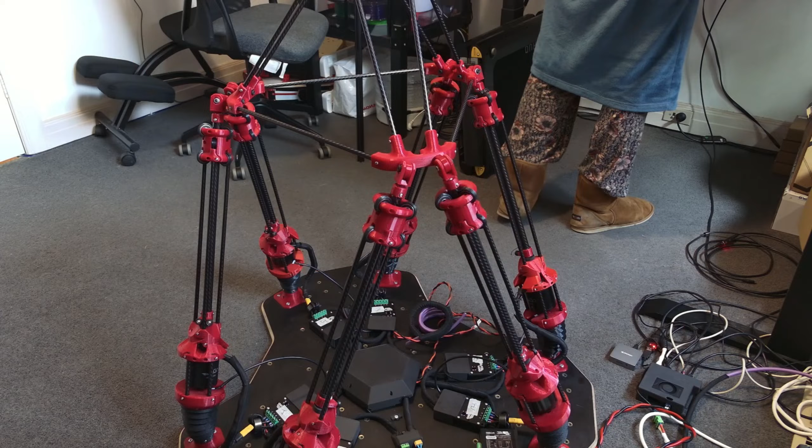To give a little backstory, let me show you on the actual robot. There's a little spoiler here for something I want to show you in a sec, but that's okay. These joints down the bottom of Jugglebot, and also at the top, are basically ball joints. One is a ball joint, and the other is like a ball joint with the twist axis removed. I'm a big fan of compliant mechanisms, and I'd really like to add compliant mechanisms somewhere into the robot. I think the best spot would be for these joints down the bottom. They need 2 degrees of rotational freedom, to rotate this way and this way. Right now they are metal magnetic ball joints, and they work, but it's very opaque.

These bellows I have around them are there to stop this twisting rotation, which they do extremely well. But because they're opaque, you can't see the ball joint inside, so you just see this thing, and it's like, well, what's in there? I don't really like that. I want it to be open and really clearly visible as to what's actually going on. So I'm in the market, so to speak, for a replacement for those joints.

Jean-Marc has taken a particular interest in compliant mechanisms, which I love, and has been looking around for different options. This one has exactly those 2 degrees of freedom, so it would have this rotation and this rotation, and you can obviously combine these together.

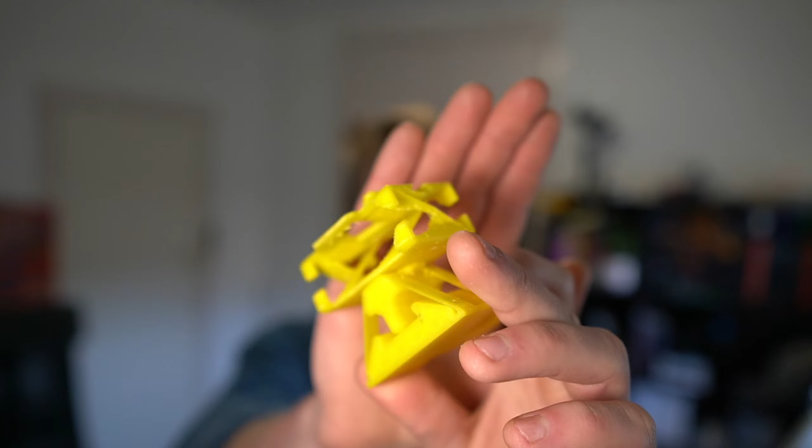It's kind of hard to show this on camera, but it can do the full, both degrees of freedom. Obviously this print quality is kind of crap, I don't know if you can really see it from a distance, but my printer could do with some tuning, but it still works. I really like this design, it's very good, it's solid.

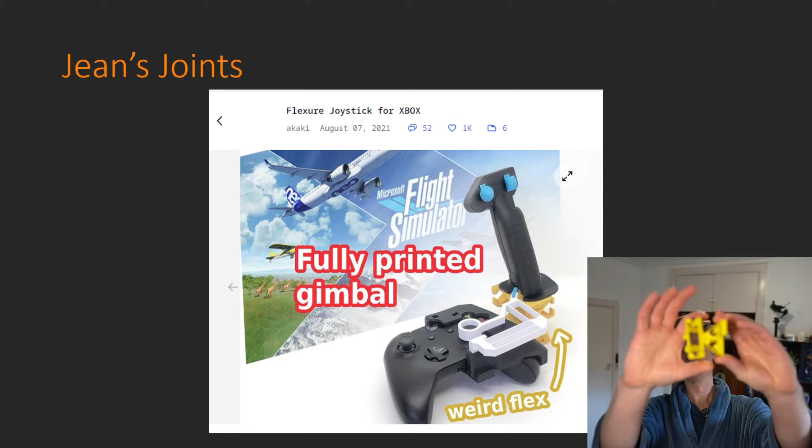I think that for me, if we were using this for the joint that I just showed, we would want to change the form factor of this a bit. I've completely just taken this straight from the model here, so there's all these weird other add-on bits that we obviously don't need. I don't know if I like the general shape of it, but the compliant mechanism structure part, super cool, I really like it.

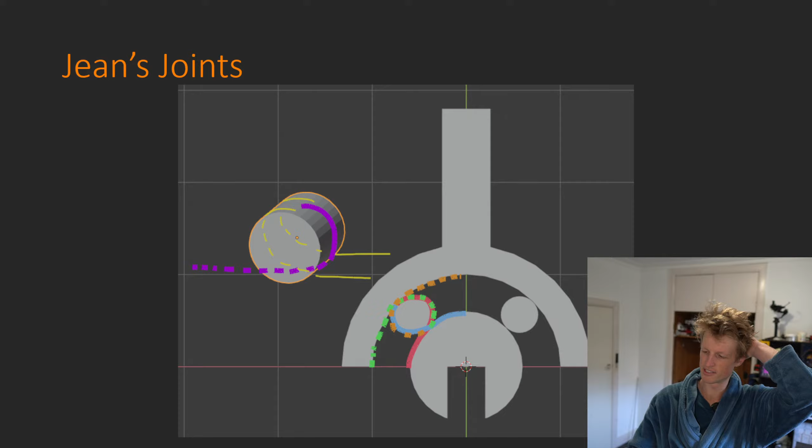Even cooler, in my opinion, is Jean-Marc has designed his own compliant mechanism. You may remember from last week, I should have printed another one off, but the printer was going non-stop this last week. Jean-Marc designed a compliant mechanism that looked similar to this, and it was the one that actually snapped in the stream, and he's come up with this slightly different design that I think has very strong promise.

It looks like it would be a bit tedious to put together, but it looks like it would be extremely stiff when it is together.

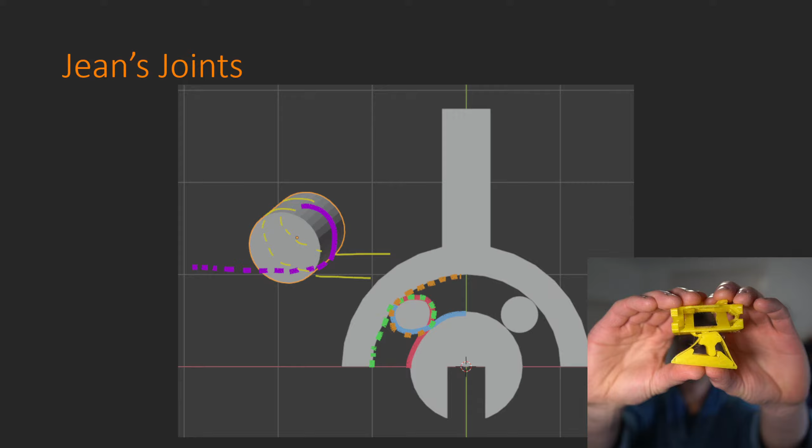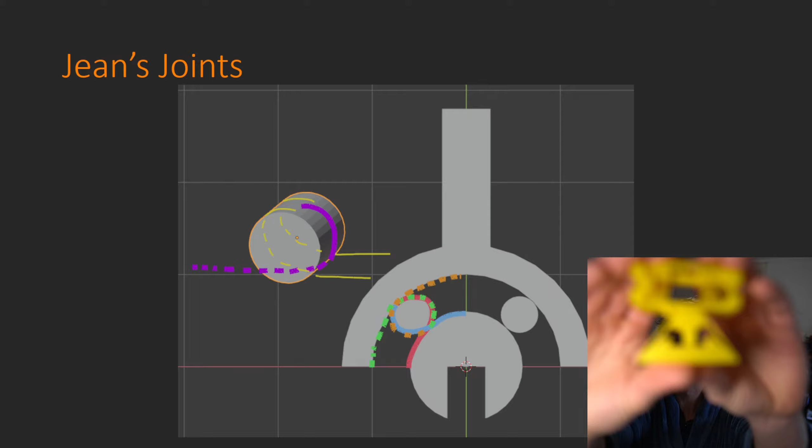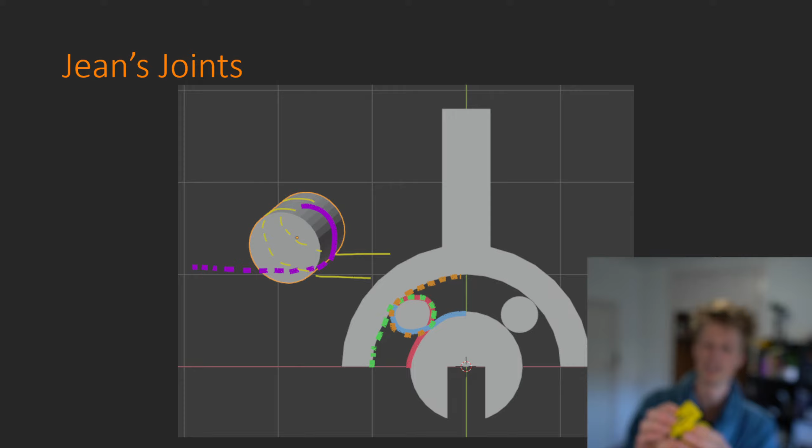One disadvantage that compliant mechanisms often have is that you can often move them in a way that they're not supposed to move. This is only supposed to be able to move with these 2 degrees of freedom, it shouldn't be able to twist this way, which it does do a very good job of resisting. But if you can see, there's a slight gap beneath this peg and the bottom, and I can compress it down, it's a little bit wobbly, so it flexes in a way that it's not supposed to flex. That's not a very large deflection in that direction, but we really want as little as possible.

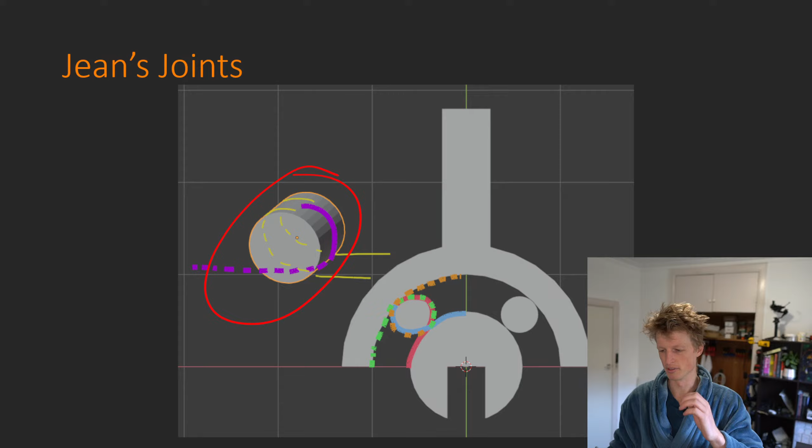I think this design that Jean-Marc has come up with would be pretty good at achieving that. In case you can't tell what's going on here, this little cylinder off to the left is an example of one of these rollers, and around that cylinder is wrapped 3 sheets. I don't know what we could use for them, but he was suggesting cable ties in a similar design, so maybe cable ties would work, but it'd have to be something quite flexible.

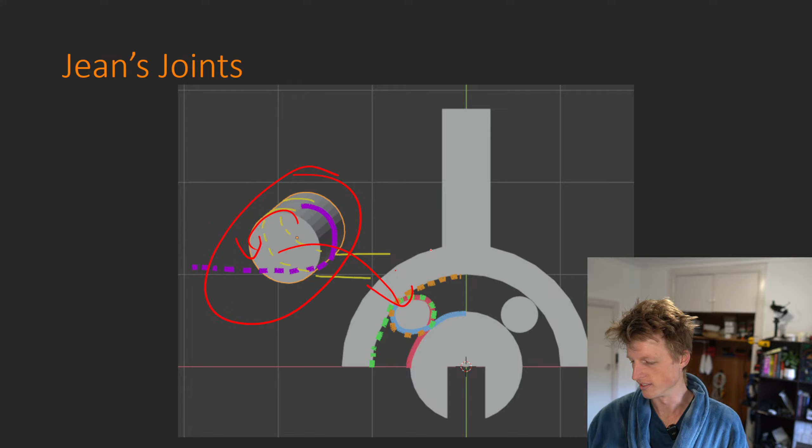The idea is that if this cylinder were to rotate in that direction, it would wrap up the purple sheet and unwrap the yellow sheets, and rotation in the other direction is the opposite. If we combine this into this kind of big arm mechanism, as the arm rotates clockwise and counterclockwise with respect to this lower part, those sheets will wrap and unwrap around those cylinders, and it should keep it all extremely tight.

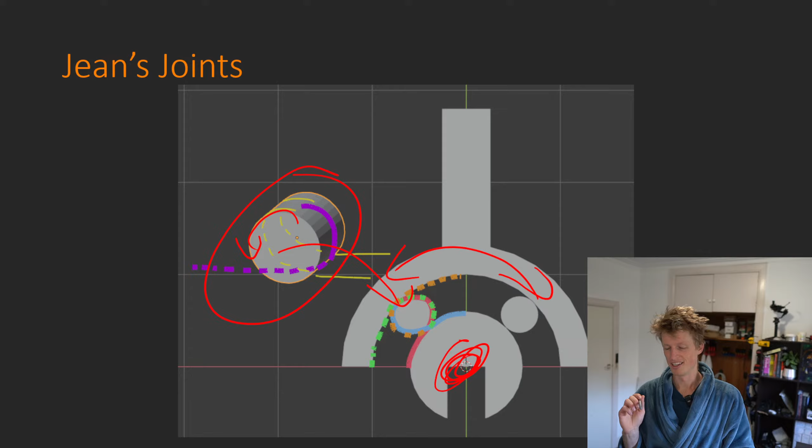I'm very keen to see where this goes, if anywhere. I think it's a really, really clever design. I would be very, very excited to see this in action.

Relatedly, Jean-Marc, I spoke with him about what I could name this segment, because this is a bit of an ongoing thing now that he's taking such an interest in the compliant mechanisms, and because I have such a love for compliant mechanisms, I want to move this aspect of the project forward, even though I don't really personally have as much time as I would like to dedicate to it, because realistically those joints are pretty good as they are. The only real gripe that I have with them is that they are covered, and also the fact that those bellows around them are really annoying to print.

The TPU has to be extremely dry for that to print nicely, and some of them have actually broken, so I need to reprint them, and I'm really not looking forward to that. Yeah, so compliant mechanisms would be great.

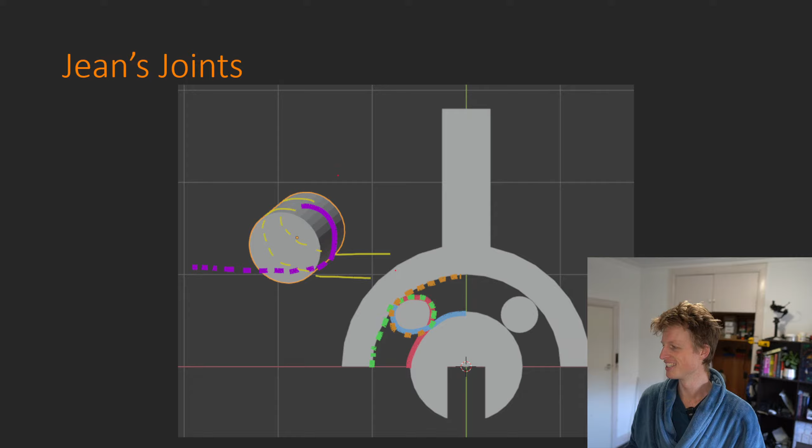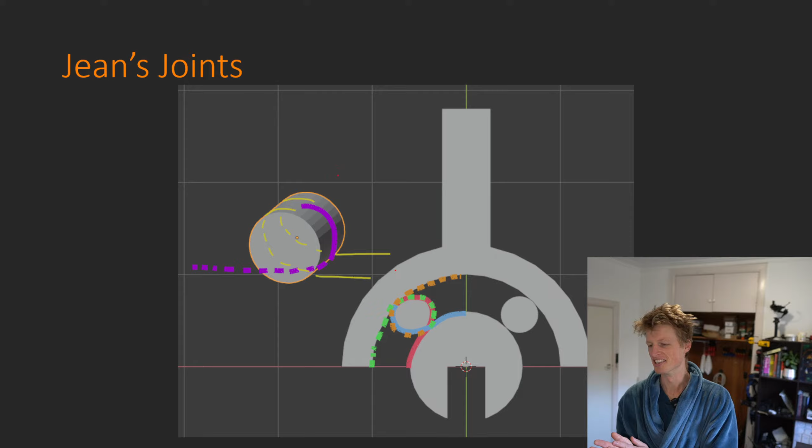If anyone watching has an interest in compliant mechanisms, I strongly recommend you check out the stream on Zulip - I can't remember which one, but I'll add a link to the description after I'm done recording. It's getting to be a pretty developed conversation now. If you have any thoughts on how we can design a 2 degree of freedom compliant mechanism with as little slop as possible, we would love to know. It's a very exciting area of Jugglebot research, in my opinion, even though I don't have as much time as I'd like to spend on it.

Cool, so on to the actual updates for Jugglebot. Jugglebot is finally moving. It is extremely exciting, I'm very happy for this. I've been very nervous about turning it on, and yesterday when I was doing all this testing, I had my hand over the e-stop button for a lot longer than I probably needed to. But I'm very glad that I did, because I almost broke Jugglebot, as I'll talk about in a sec.

But first, I want to take you on a very quick tour of what the robot looks like now, because I've made some small but meaningful to me changes on the robot. I don't know why this camera is so droppy, I need to look into that.

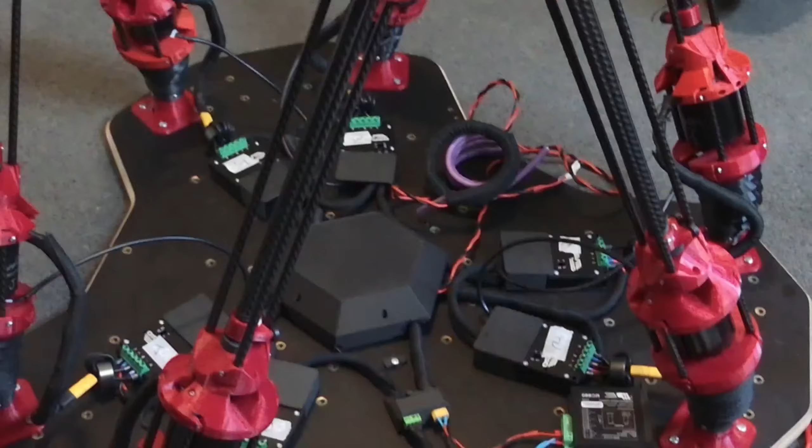The biggest change that I've made since last week is - let me zoom in a bit so I can show you more properly - we now have proper ports for connecting to the robot. Before, I just had these two cables, the power and the CAN cable, just kind of dangling around, but now they've got this nice little hub. Soon, hopefully, I should be having a new regen clamp arriving, which I'll talk about when it matters, so these cables will all be nicely covered with this black sheath and look crisp and beautiful.

I've tested out covering the CAN cable plus the power cable that will go off to the arm, wrapping them together in this black sheath stuff, and that works extremely nicely - I'm very happy with how that looks. Of course, routing the power alongside the CAN communications isn't really what you're supposed to do, but I don't see any other viable option right now, so this is what I'm going to do, and I think it looks very good. That's going to run up to here. I've got more of this black wrapping stuff coming next week, and hopefully I'll get it all together looking schmick.

One funny story - I've got these power cables set up that will run up to the hand, and yesterday when I was powering everything on, I'd connected all this up to these bus bars in the middle, and I kind of just forgot that those power cables were dangling. So I had like 48 volts or 45 volts running through these while I was doing other stuff, and these two terminals were just kind of dangling, sitting around wherever they happened to be. So that was not great - I almost shorted the circuit or zapped something else depending on where they landed. Thankfully that didn't happen, and I noticed before they zapped anything, so it was all good.

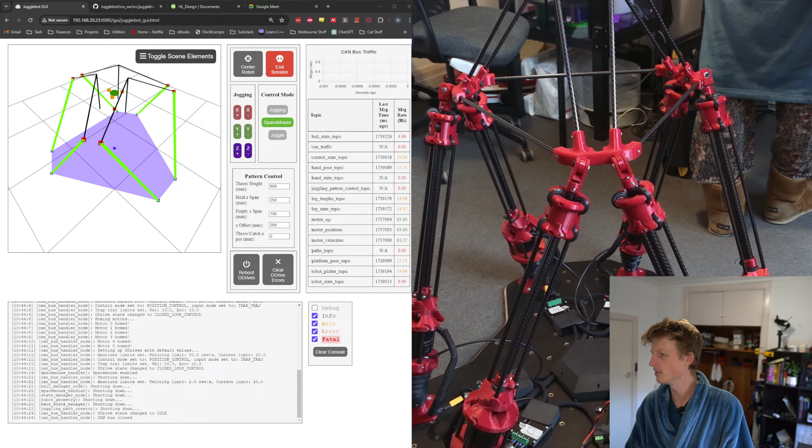Okay, so now let's have a look at Jugglebot moving. We have the GUI as before, that hopefully you remember from all those weeks ago.

And let's turn it on. It's always a bit nerve-wracking turning it on and getting it set up. I don't really know what view is best to use here, so if you want to see a slightly different view, let me know. I can get rid of myself. Yeah, we don't really need to see me. Where am I? This one.

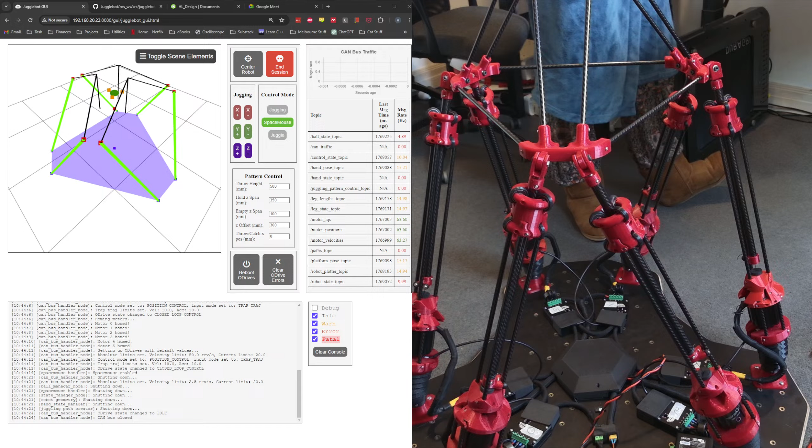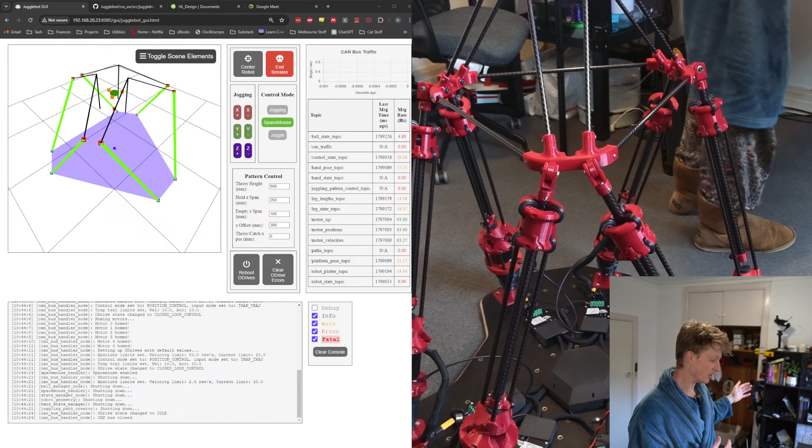Goodbye. One thing that's noteworthy for anyone doing a similar project is that the ODrive 3.6s had this routine. The old motor controllers I was using would go through this sequence as soon as you powered them on, where they'd run the motor a little bit until it passed a certain point relative to the encoder attached to the motor. They'd do that automatically by default. The new ODrives, the ODrive Pros, don't do that, and I had to manually put in a thing so that when I start my Jugglebot code, it does that automatically, which was a little bit weird that one of them does it. They do it very differently, but I guess that's just what they decided to do.

Let's get rid of me again. No.

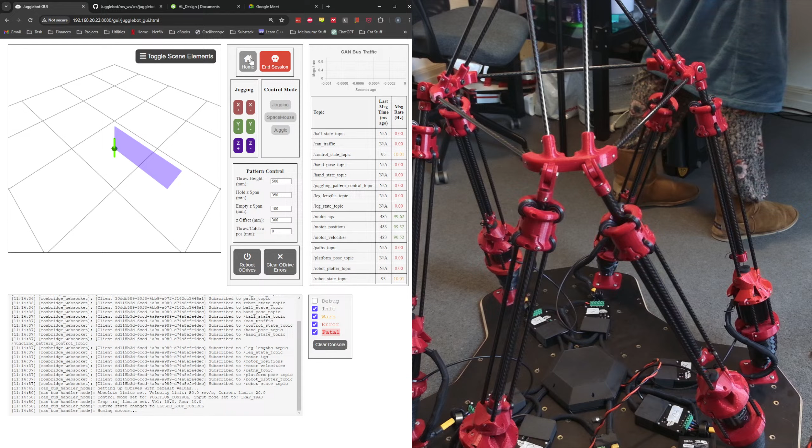So, yes, we've turned on. They've all found their indexes, so now we can home, and all the legs will shrink. This runs way faster now as well. I haven't changed this code at all. It just runs so much faster on the ODrive Pros than it did on the 3.6s, and I don't really know why, but it does.

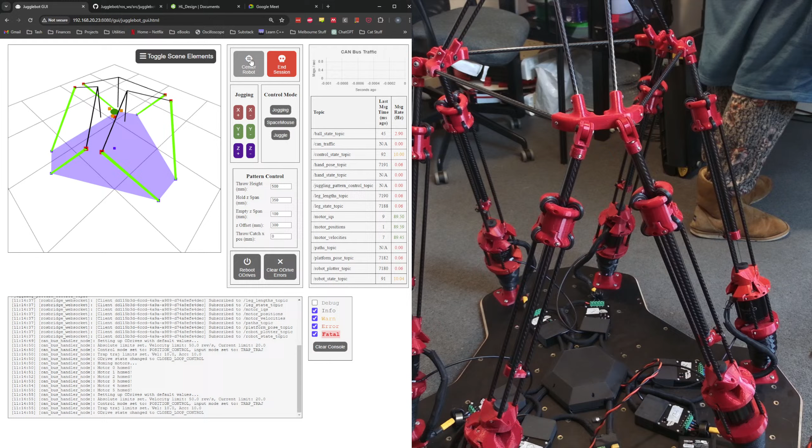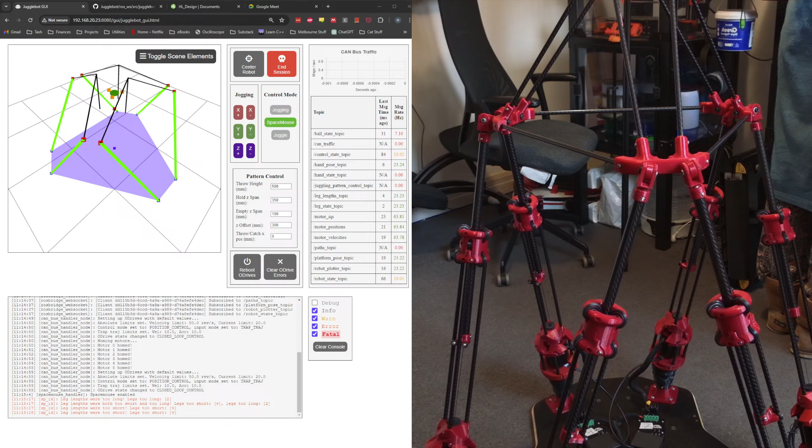And we can go to SpaceMouse Control, and now I can move it around. And it's great. Let me fix the camera up a bit. Yeah, so it's functionally the same as it was before, really, which may not sound super exciting. I've turned it all around so it's not facing the same direction as the SpaceMouse, so I can't really control it in the ways I would like. But yeah, it does everything it could before, which I guess isn't super exciting, but it's exciting for me because it means that it actually works now and doesn't break itself. And now I can go end session, and it closes.

No more errors. Look at that, beautiful. Actually, there was some. No, that's fine. Those errors are fine. Yeah, great. I love it. It's so nice. E-stop, kill it, gone.

So good. Yeah, I was definitely very, very nervous yesterday. And to give you an indication of the experience as to why I was nervous, it's because I almost broke all 6 legs several times yesterday while I was changing my code over to run from the ODrive 3.6s to the ODrive Pros.

My problem was that in the homing sequence, let me explain this fully. During the homing sequence, the robot will move each leg in one at a time. I do have thoughts about doing these all simultaneously, but that's a separate thing. Right now, they go one at a time down until they hit their end stop, and there's a little bit of foam padding to kind of not make that too harsh. So they run down, the current will spike in the motor because it's hit the end, and then when that current spikes over a certain level, the ODrive says, yep, you've hit the end stop, and now, so that we don't hit the end stop again during normal operation, let's set the 0 point of the actuator to be a little bit above where we are right now, where we have registered being the end.

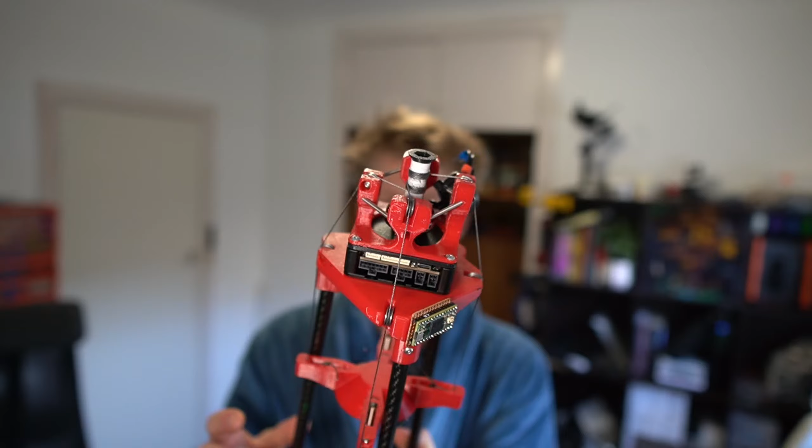Last week I showed off this design, which is a capstan-based design where there are two strings - I'm not going to explain the design, watch the last live stream if you're interested. But they wrap around the spool here at the end, and that's how it controls the hand position. As I turn the spool, it will move the hand up and down.

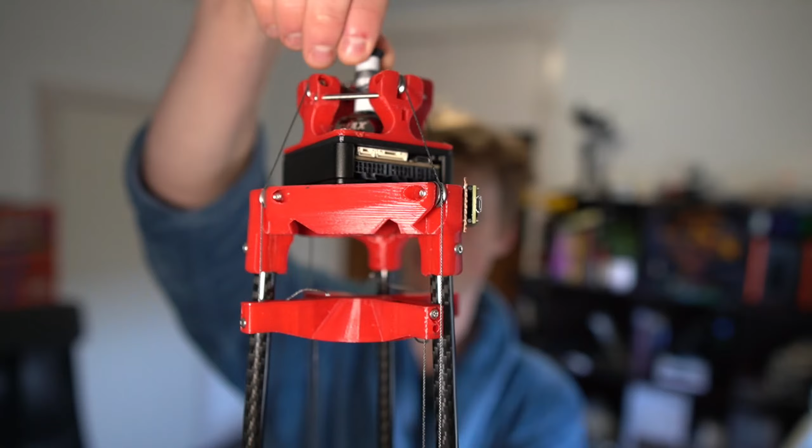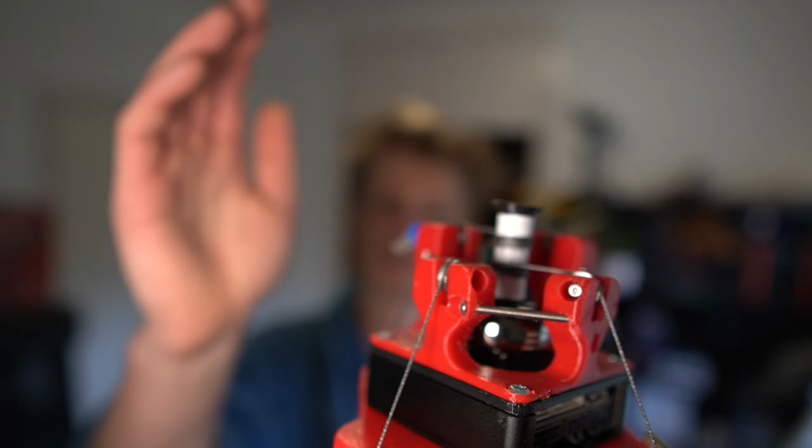Last week I noted that I had some problems with the hand slipping, and I previously only had 2 wraps on the spool at the end here. Now you can see I have, I think 5 or 6, depends how you want to count it, and honestly it is significantly better. I really need to get better at trusting the math - this is something I've had a hard time with my whole life. Math is good a lot of the time. Sometimes you make assumptions and the assumptions just kind of make everything fall apart, but in cases like this, the math is good.

If you look up the capstan equation, which describes the forces and slipping with a rope wound around a spool, the amount of friction generated by each wrap goes up exponentially. So 2 wraps will have approximately, from memory, about half as much friction as 3 wraps, which will have about half as much as 4 wraps. Each wrap you add massively increases the amount of friction here.

So going from 2 wraps, what I had before, to 6 wraps, I can't get this to slip now. Previously I could tilt this hand to get it into a wacky position, and I can't do that now. However, if I press it in a tilting position and slide it up and down a couple times, it will stay tilted. Then I have to run it back again a couple times to flatten it out.

Even though this is a lot better than before, and honestly good enough for me to run as a prototype, to just practice the coding side of this hand, it's definitely not good enough for a long-term solution. Over time that could tilt, and the fact that it could tilt is enough to make it a non-starter as far as I'm concerned. That's no good, which is annoying because I really like the form factor this has.

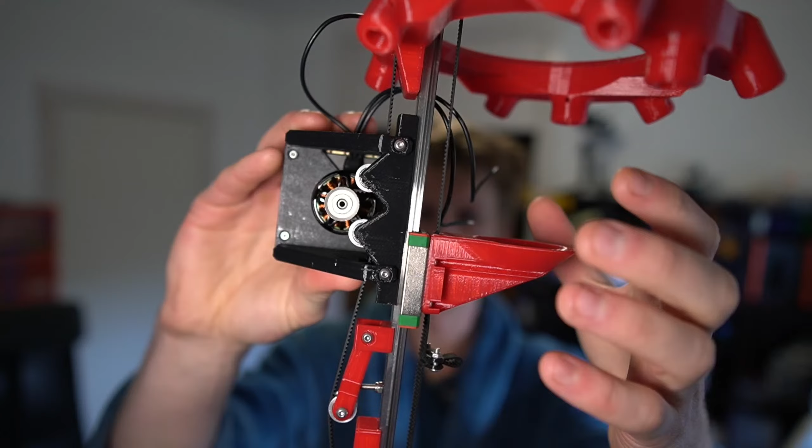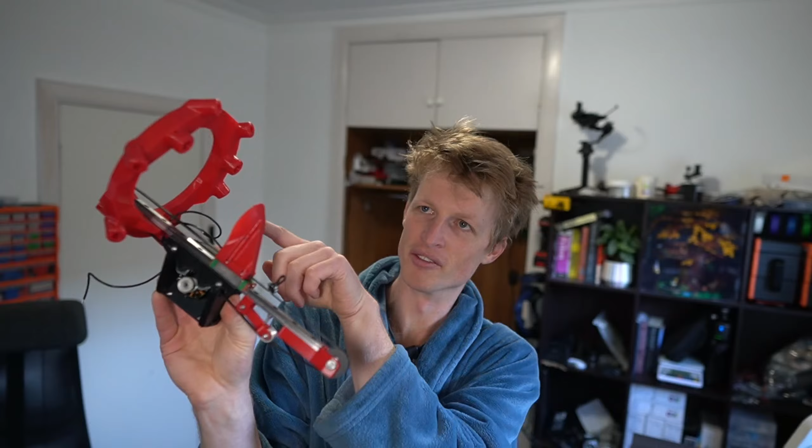So let me show you the way this runs. The belt is terminated in the hand, which I'll get to in a sec. This is just a little thing because I had to change the way the belt was routed, and in that change the length of the whole path changed, making it impossible for me to get the belt out of the hand now that I've got it in. So I figured the easiest way to remove a small bit of the belt was to do this, which is obviously a bit dodgy and wouldn't happen in the real thing, but there you go.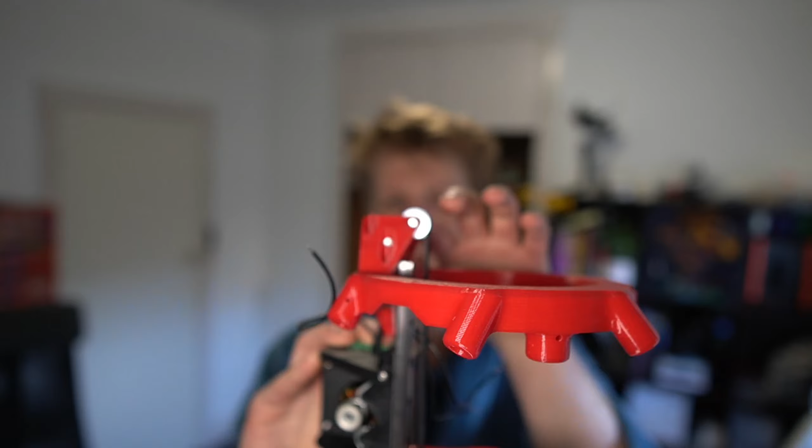The belt then runs around the top. There's a second pulley underneath there. These were supposed to be side by side, but I was measuring my idler pulleys using old pulleys from an old project, and I didn't have enough of those, so I bought some new ones expecting the dimensions would be the same, but they were not. So I had to change the design a little bit to accommodate them. Down the bottom, it just runs around this one large pulley, which previously was two small ones, but same reason, they didn't fit, so I replaced it with one big one.

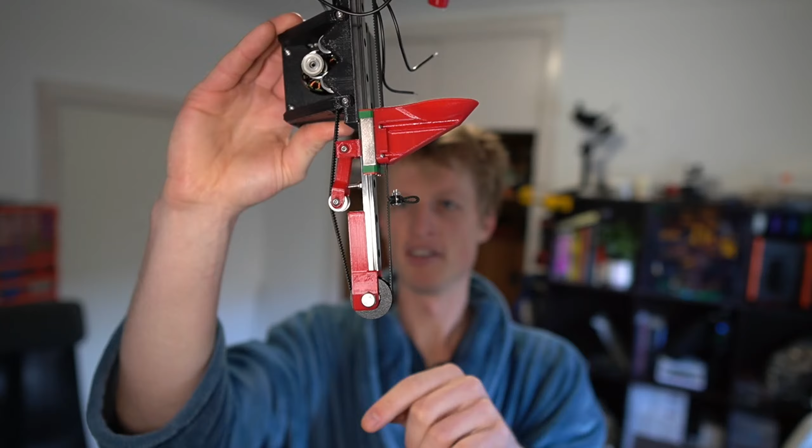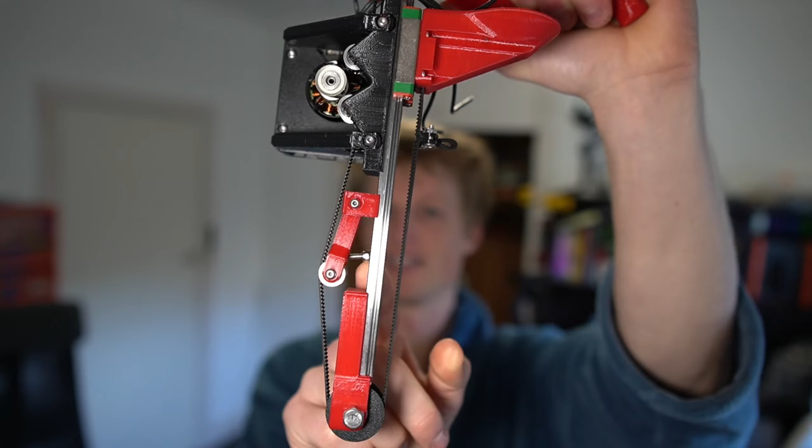To tension the pulley, I'm quite happy with this, I really like how it worked. It's a little bit dodgy because that bolt doesn't sit flat, but the general idea is that this arm can come out, and on it sits an idler pulley. To set the position of this arm, how far out it is, I can grab pliers and hold this lock nut, then just tighten or loosen the bolt through the hole in the other end. That bolt just runs through one of these holes in the linear guide.

Around the motor, we've got two idlers keeping tension on there. My problem is that this feels very frictiony, not as clean as the other one. For example, with this design, if I drop the ball in, it easily travels the whole way down irrespective of where I drop it from. But with the belt, it doesn't. Something is stopping it from sliding as smoothly, which is a bit annoying because I was very hopeful for belts.

I'm fully expecting this to be a me problem. One reason why I think this might be happening more than it should is that this linear carriage has actually lost a couple of its balls. That could maybe be adding to it, and maybe this bend radius here is a bit too tight, maybe, but I don't know.

If anyone has experience with belts, and in particular them not running super smoothly—like it's smooth, but it's not transparent, I think is the robotics word, where it has extremely low inertia—I want this to have as low inertia as the string one does. So I don't know. It is cool though, I like how this works, but yeah, I don't know. So that's the second option.

And the third option, I will have to change my space mouse over. I need a dedicated Jugglebot space mouse. If 3Dconnexion wants to sponsor me, I'm all ears.

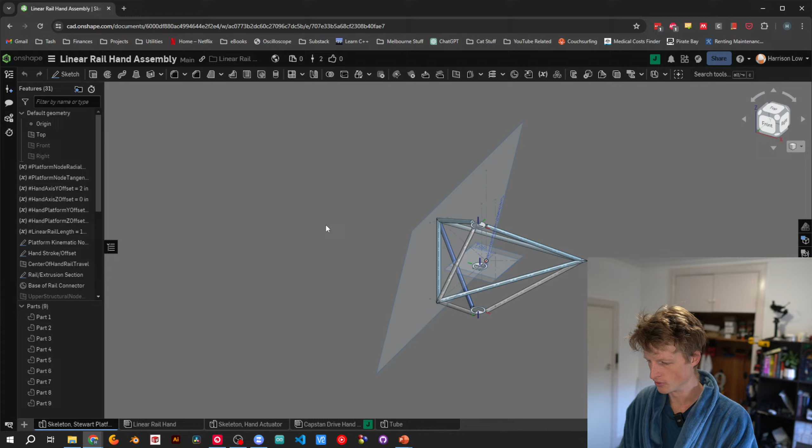We've also got a third design, which is John's design. I don't remember where he's put it—I think in here. He made a very cool... oh, I'm on the wrong screen. There you go. So John on Zulip has made this.

Why is my space mouse not working? Oh man, I've got to use my mouse like a fool. Hang on, give me one second. I feel like it should be there. Oh, it's one of the tabs down the bottom.

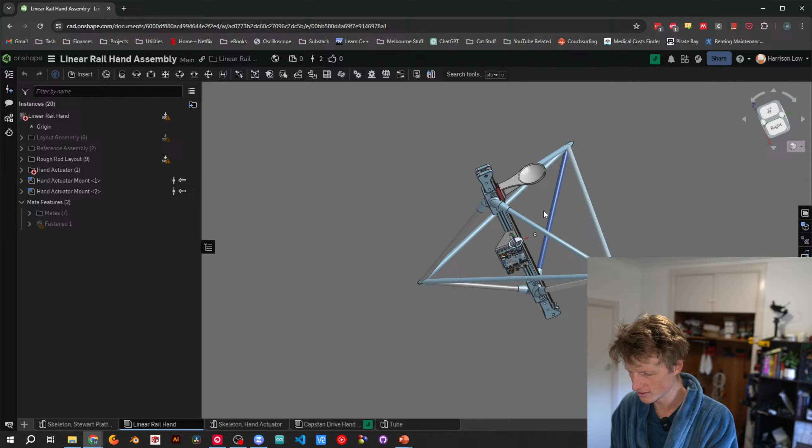I'm starting to get familiar with Onshape, and it's definitely taking a little while. So John's—sorry, I'm going to be very clunky because my space mouse isn't connecting properly right now. But John will show this off more properly in the working session. We're going to have a good talk about the different hands and this sort of thing.

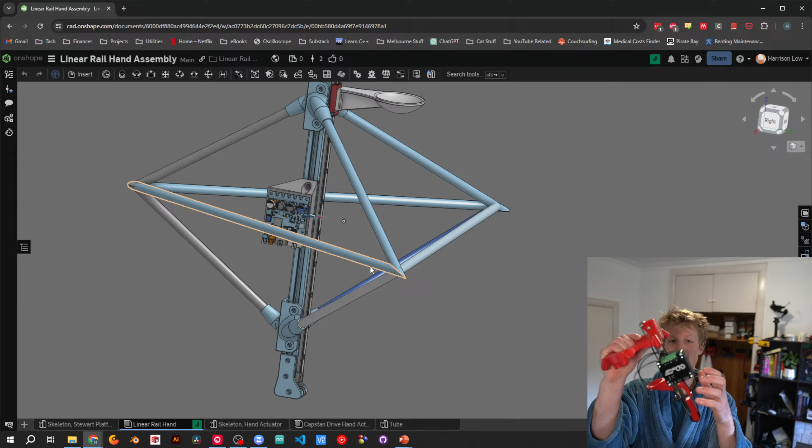But just to show you very quickly for anyone who isn't going to stick around for the working session, John has used a linear guide rail, the same as what I have here, except he's added it to a backbone using a 20 by 20 aluminium extrusion like this. I was originally a bit hesitant about this because of the added weight it would add, and as far as I'm concerned, this linear rail is extremely stiff.

This is only a really short one right now, the only one I have on hand, but I've ordered some significantly longer ones, though they're probably not going to be here for another 2 weeks or so. So I'm just doing a little tiny shorthand for now. When I was feeling this around, I was like, yeah, the linear rail itself is so stiff, there's no way it's going to have any issues with flexing or anything.

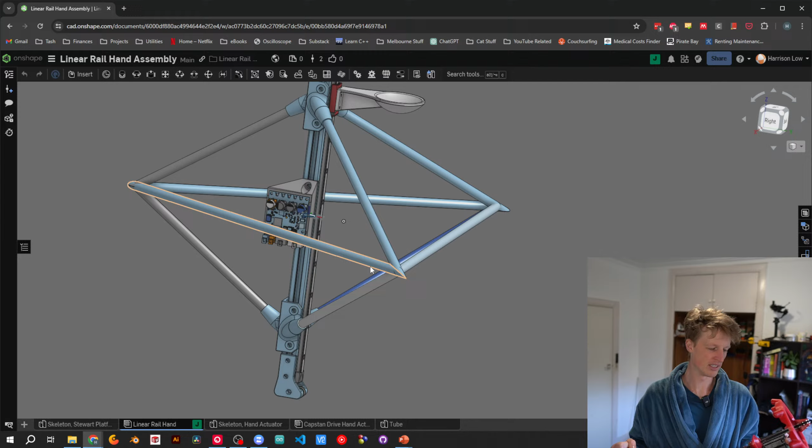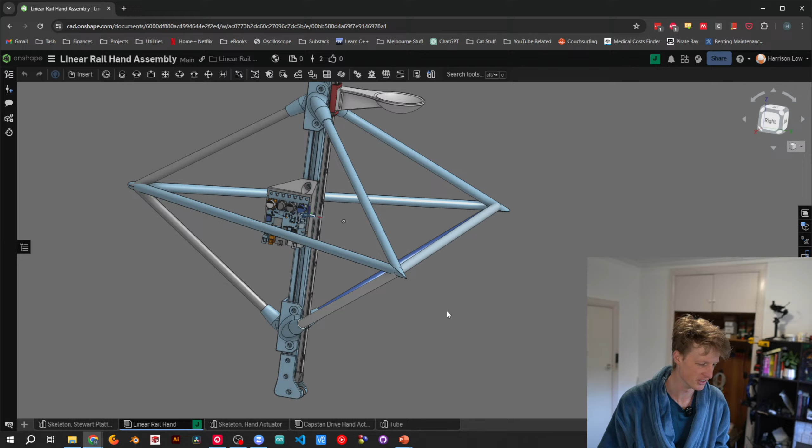But John did have a very good point regarding vibrations, which is something I haven't really considered too much because I just haven't been working at those sort of speeds yet. But I have every intention of bringing Jugglebot to the point where it's throwing 7 balls in one hand just to itself. And if I've learned anything from my over a decade of juggling, it's that it's extremely fast and a lot of power has to be going through the hand during that process. At that level, it's pretty likely that vibrations will start to play a role and be an issue for a design like this, where I'm only using a single linear guide rail. So I do think John's idea of adding this aluminium extrusion backbone is a very good idea.

Is the space mouse going to work? Nope. Okay.

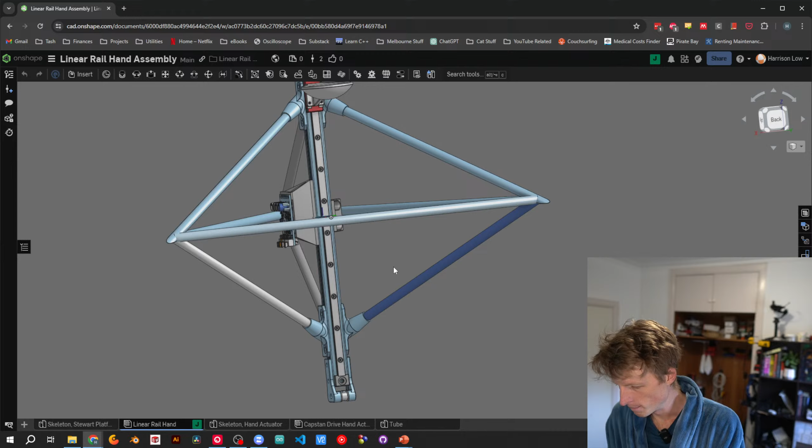I'll let John explain this himself more fully. It's similar to the belt design that I have here, except he's using strings instead of belts. But yeah, I'll let him explain it more fully.

If anyone knows why my belt is so firm, I don't know. It could also be a low quality belt thing. I have a belt from a very old printer that I took apart years ago, and I didn't know what size that belt was, so I bought some new GT2 belt on Amazon. It turns out they are the same.

I've noticed that the old belt, the one from like a 2014 printer, was extremely stiff, and I could push it through channels a bit more easily. But this one is really soft, and it was really hard to push through the same channel. So I'm wondering if it's just a belt quality issue. But I don't know, I would think that the softer belt would flow even more freely than a stiffer belt, so maybe it would go in the other direction.

I don't know. Another question: I'm curious if anyone has ideas for terminating the belt. What I've done is, I don't have Onshape open so I can't show you right now, but inside the hand, this is the first one that I made, inside here are 2 channels. In this design, those channels run like an X, one going that way and one going that way, and there's a skinny part, a narrow part of the channel, and then it widens up to a thick part.

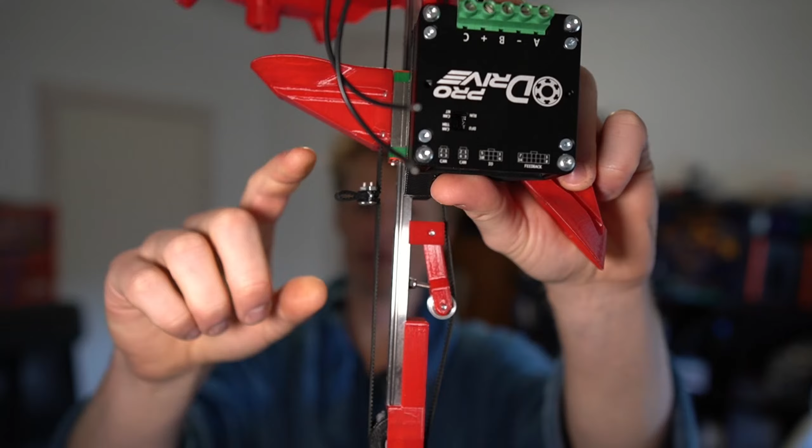Which is a good thing because it's secure, but it's a bad thing because I have to do things like adding this little thing in here when I measure the length of the belt wrong, because I cannot edit it once it's in there. So if anyone's got ideas for how to do that, I would be all ears.

Especially because to get it to work with the slightly revised design with these 2 channels, I had to actually sew the end of the belt together because I couldn't hold it myself in my fingers and pull it at the same time. So I had to sew it, which took some time. It was a bit tedious. I'm very open to different suggestions on this.

John's design is great. I meant to do this in a slightly different order, but whatever, you get the idea. So that is it. So damn close - I know I've said this for like the last month, but man, it's so good.

I strongly recommend, if you are interested in this, stick around for the working session stream, because John will - we're going to have a good chat. I don't know what stage John's setup is at right now, but he has sent some really cool videos to Zulip where he's gotten multiple throws and catches in a sequence where it just keeps going. So very promising, and it sounds like he's pretty confident that this something in here can work, and we just plonk it on Jugglebot, and then off we go. We're good. We're done, for now, for one bot, that is.